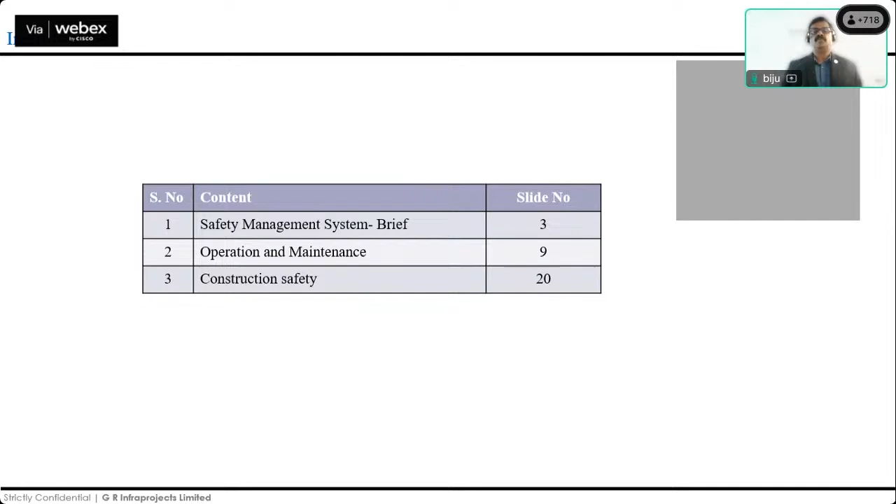To start off on the safety management system, for most companies I would say it is more aligned with the ISO standard 45001. What it really means is we've got 4 pillars, and the first is safety policy and objectives. This institute, organization, or corporate should have a policy and objective where it clearly states their safety thought process.

Then you have safety risk management. Now, safety risk management, we all understand, is similar to business risk management. Safety of the people, of the workmen, of the road user - they're all focused on this.

We've got the safety assurance part, where you monitor, measure, conduct audits, and analyze data for the betterment of a work activity. At the end of it, you have a promotional activity, like the one NHAI conducts at the start of the year - an event on road safety and multiple other events throughout the year.

So all 4 are the pillars for the safety management system, and this in fact drives the organization towards excellence.

Now this management system is then later broken down by all organizations into a kind of framework. What this framework looks like for safety is you've got your customers, your client, your stakeholders, and the legal system. Both of these together need to have a planning at all levels - it could be at a project site level, a corporate level, or different levels. You've got to understand what your stakeholder or legal requirement is talking about.

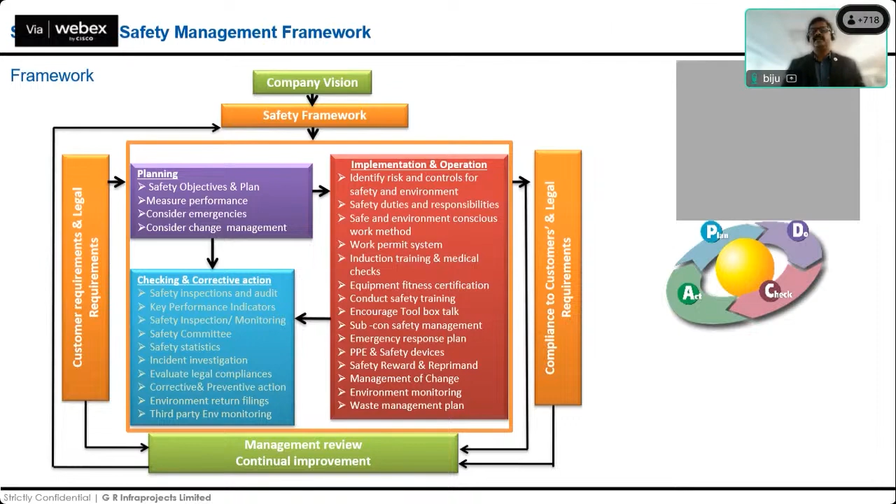Now, to get this entire thing right, we need to first and foremost understand that safety is an integral part of every business. Be it on a client side, be it on a concessionaire side, be it on an advisory side, safety is an integral part. Now when we make that an integral part, that is when we drive in a safety culture.

Safety culture does not happen in a day, it takes time. And why does it take time? Because of this list here, from tracking legal requirements to understanding ISO standards, to understanding what the client or relevant stakeholders desire, what is the process that they have set.

Being a role model in that process, and then you encourage people to be more transparent. When you have workers, contractors, concessionaires reporting observations and near misses, this is when you build transparency and give them confidence that things are working out right. You set out KPIs, KRAs, and so on, until you have an entire system running around the PDCA cycle, like I mentioned earlier, so that a culture starts building.

Now with this, we should also understand the first and foremost part of setting up a culture is understanding the activity in hand. Now the activity here would definitely be a construction activity or an O&M activity. For construction activity, get the method, the process from the design, from the planning to the execution, get it clear across the entire team. For example, I would take one example, say girder erection, which is quite critical at most sites.

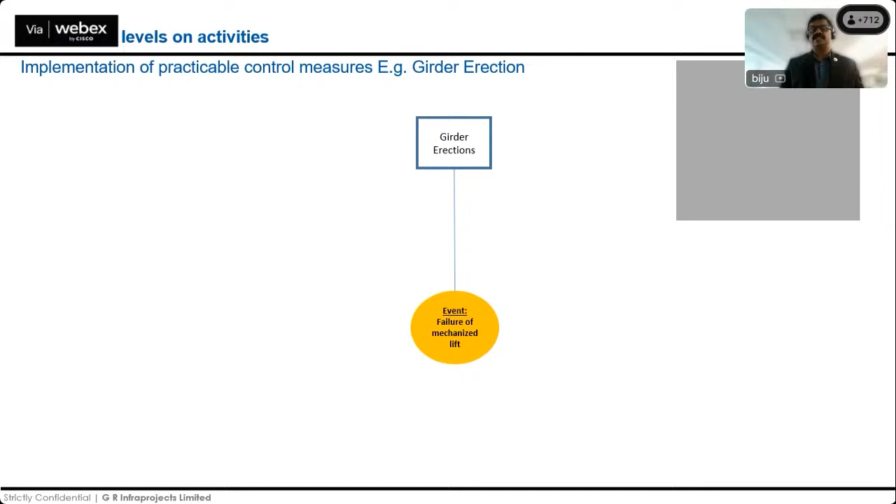So I've broken it down into cause and preventive measure. We'll look into the mitigating measures and consequences later, but let's understand this. This is just an example, please. All other activities are broken down in similar fashion, right? So here for a girder erection, we have the machine involved, that's a crane, we have the load involved, and lastly we've got the weather and the safety control measures.

Now crane, as we all understand, comes with its own requirement. You need to inspect the crane, you've got to have a third party inspection. The ground needs to be done well, it has to cater to the load. And at the end, you have a dry run or a mock drill.

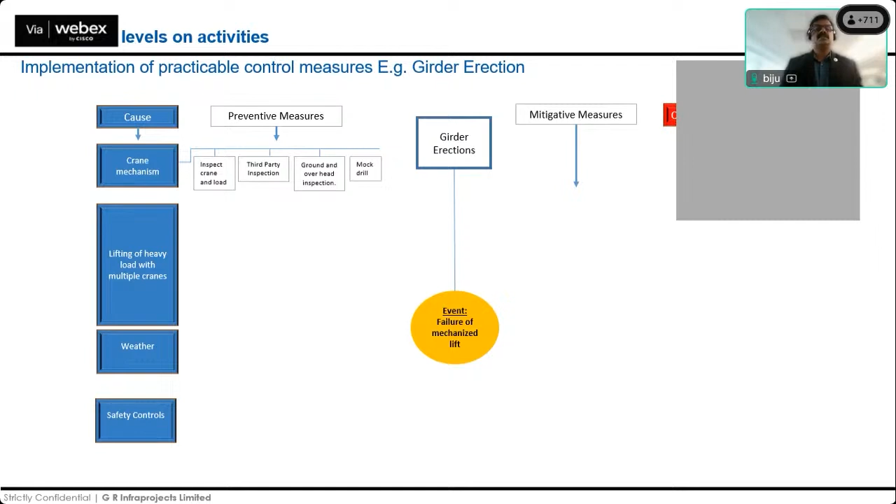Having done this, ensuring that your crane is in good hands also, we set in to make a lifting plan based on whatever the load is, what shape, size, weight. We identify the load and then create a lifting plan.

Now having done that, you've got to understand what kind of rigging practice gets involved. You would have constraints with your load carrying capacity, you would have constraints with the area. So understanding all that, and the shape of your load, what kind of CG does it maintain, now you've got to understand that rigging process.

And of course, for that, you need competent people to support you. From the crane operator side, at each and every step, he's got to understand the safe working load capacity of the crane, whether it is within the parameters. To help him, he would definitely have a signal man if he is in a blind spot.

And of course the weather, like today, the entire weather needs to be considered. Most of the places it is raining, so how do you really understand it better?

And at the end, having understood this entire process, we have the safety control system, starting off with your permit to work system, checking whether any loose objects are left out, checking whether each and every personnel on board is trained, and the roles and responsibilities are clearly identified. The fall protection system is in place, and finally the entire documentation, starting from the lift plan, the third party certificate, to ensuring competency training, all this has to be maintained by the safety team on ground.

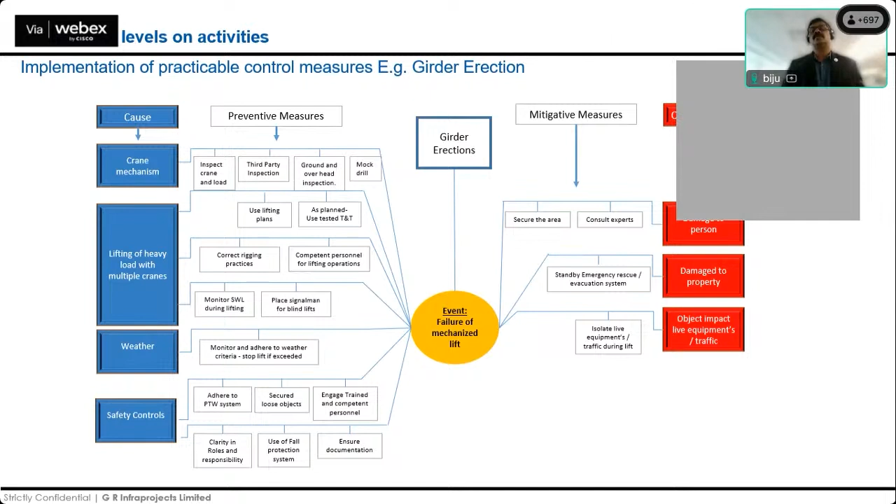Now, having said that, risk involves a fair level of understanding all across. It involves a lot of partners. It is just not the safety team that could drive safety all along. You need experts. And who is the best expert? It's definitely the engineer on ground. And the engineer has to understand each and every activity, the work method, and the risk assessment.

Now, on the terms that are being used, you could just understand it better. RA stands for risk assessment, SWM stands for safe work method. So having understood both of these methods, the engineer then goes in to identify the control measures. Now these control measures generally are listed down in the form of a checklist, so it helps the engineer day in, day out to check these are the minimum requirements.

Having understood that control measures are in place, what does the engineer do? He simply calls in the safety team to verify it. Now you have somebody, a doer and a verifier. You split the entire activity into a doer and a verifier. Now, having verified it, the safety team takes a call whether it is within the guidelines, within the SWM, within the risk assessment.

If it is within the risk assessment, no issues. If it is not, he calls in for a reassessment. He does not let the job go ahead. He calls in for a reassessment. If everything is in place, he says yes to it, and then you start the job.

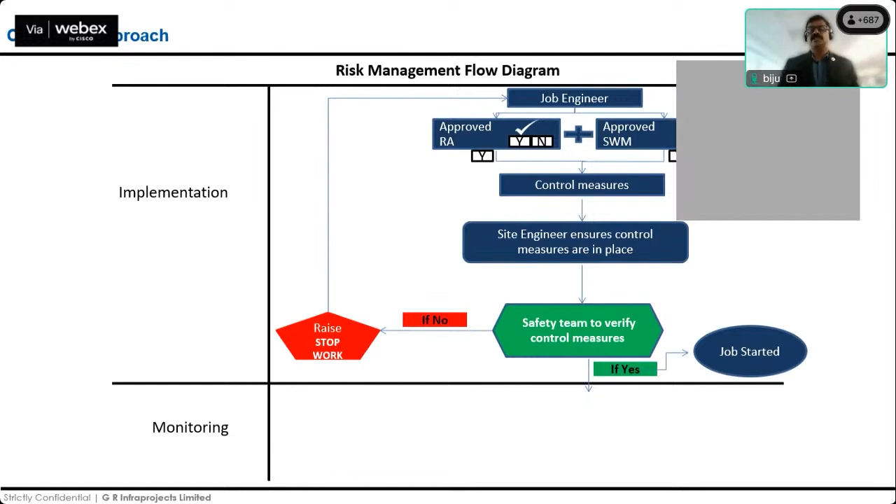So this is the initial process for all activities. Having said this, now your activity could last for an entire day, or it could be a month-long activity. Now you've got to monitor it. The simple monitoring mechanism is check on the work permit system, which is called every day. Check whether it is abiding by whatever the checklist is talking about. If yes, continue with the job. If no, then again you go back to the engineer to rectify it.

So this is a normal work execution process that is undertaken jointly by the safety and the execution team together on site.

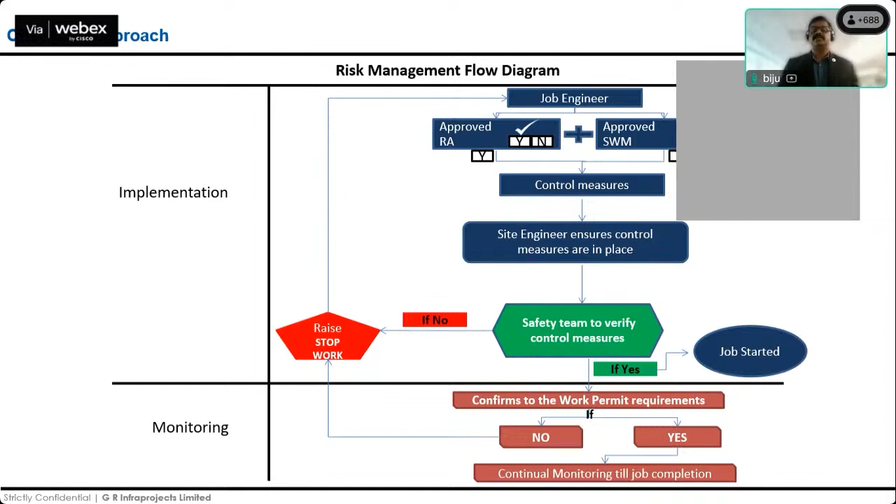Now, having done all this, it does not really indicate that my monitoring, my implementation process are in place, does not really indicate that we are safe enough. So long time back, round about the 1930s, there was a professor by the name Heinrich, and Mr. Bird. Heinrich and Bird, they came up with a triangle popularly known as the Heinrich's triangle theory. Now, this triangle theory tells us that at the base of the triangle, you have unsafe acts that gradually build on over the period into a fatality.

And the unsafe acts, if you realize, it is for 3 lakh unsafe acts. That's a huge number, 3 lakh unsafe acts. You would end up having 600 near miss cases. 600 near miss cases would eventually develop into 30 injury points. This 30 would finally go into 10 lost time injuries, and 10 lost time injuries would have 1 fatality. So this is what Heinrich and Bird wanted to tell the entire world in the 1930s.

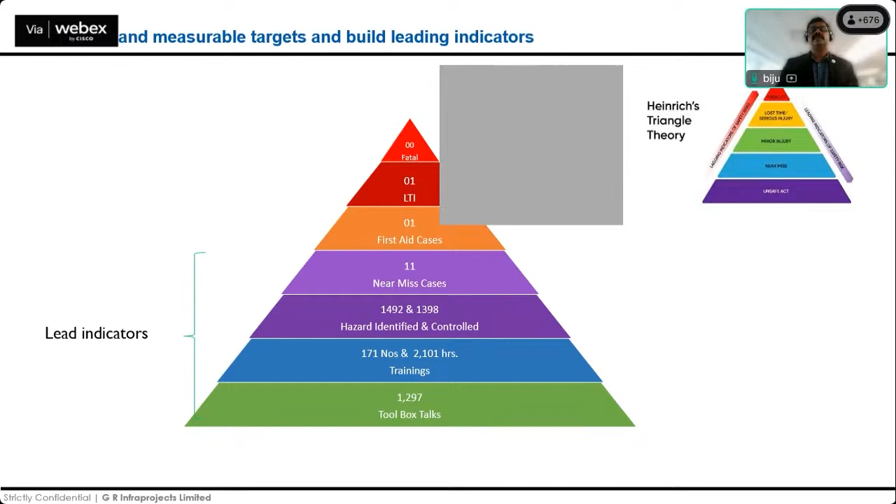So this is how we have understood Heinrich's or Bird's triangle. We set them into two different aspects. One is known as a lead indicator, and the other is called the lag indicator.

Now, I need to prove Heinrich's triangle is non-existent in my organization. So what do I build on? The lead indicator. My lead indicators are toolbox talks, or TBT for short. I build on training, raise awareness, pick up hazards, observations, and controls, and I also support near miss cases.

These four, I keep telling all the people on ground, this is where I need to emphasize. Having done that, that is the only way I can stop the lag indicators, or stop myself from getting into the Heinrich's triangle. This is why every site, every project safety officer or engineer on ground is told how important your toolbox talks at the start of the day is.

Toolbox talks at the start of the day is the base of not achieving an injury. Every project manager supports a TBT, every project manager supports training, every client, every concessionaire does it. This is because it is the foundation to stop any incident from happening.

Near miss cases are definitely proactive, because the more near miss cases you have, the more chances of analyzing, stopping, or preventing an injury. Hence, it has been put into a lead indicator and not looked into as a lag indicator. The more near miss cases you have, the more chances of analyzing and having correct SOPs.

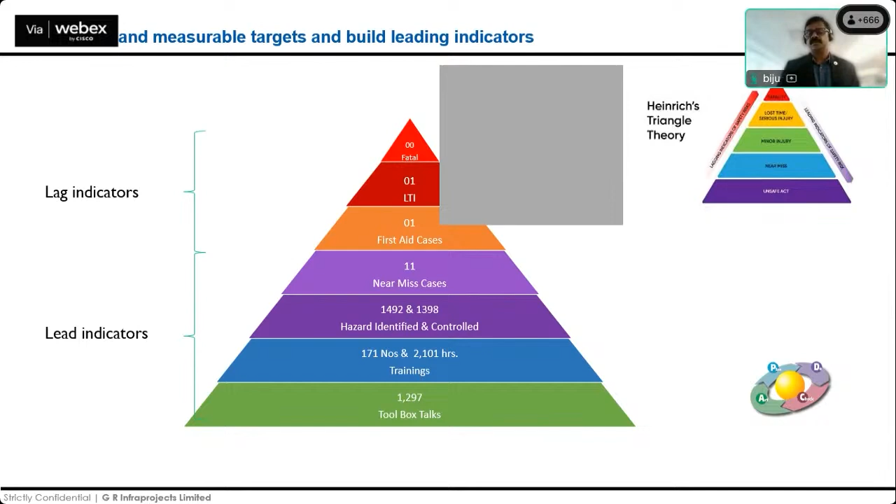Now this is what I call a PDCA cycle, where the entire team works together to drive safety. Now, getting into our core issues, I would start off with operation and maintenance, because most of these things are also part of your construction phase at some point or another, at a different stage.

Every asset on the O&M phase needs to be understood through the asset management plan. What does an asset management plan talk about? It's about aligning policies, and these policies fall under a bigger umbrella termed the Strategic Asset Management Plan, or SAMP. This SAMP rolls out into different projects or assets, where every asset needs to understand the issues, external and internal.

Who their interested parties are. Based on that, every project works out an asset management plan in which they rope in daily activities, monitor objectives and targets being set, and how good they are at improving it. The entire process goes into performance monitoring by different clients, even by road users. First and foremost, every asset needs to have this asset management plan in place.

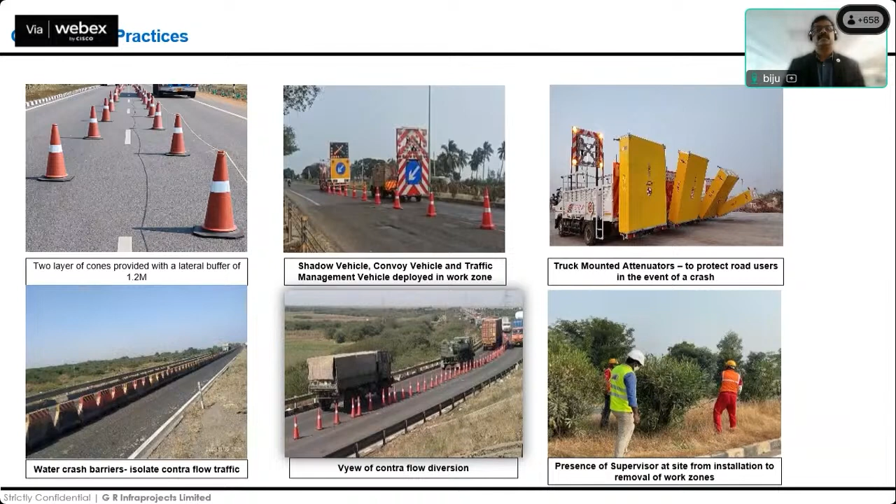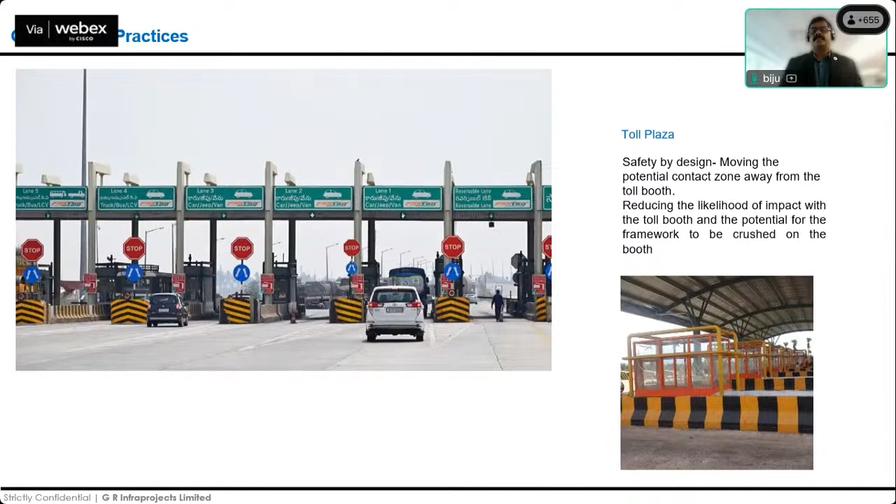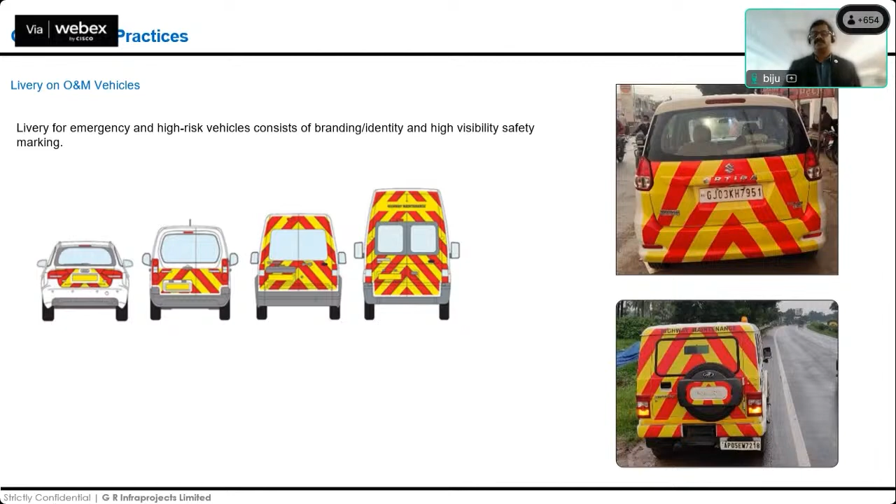Now coming into our core area, how do we ensure that the road user and the worker are in an environment that is safe for both, and as an asset, we have traffic running smoothly. For that, IRC SP 55 clearly outlines the guidelines, giving all the parameters required to ensure this is in place.

Now, our understanding of IRC on ground over a period of time, everybody has represented it in their own easy way. But I would like to deliver what the IRC really tells, what table 4.1 really addresses, or the pictures in 10.1, what it really says. Giving a few examples would make it easier for us to understand any other work zone.

Now, for a work zone on a live highway, if we have to occupy the slow lane, from a road user perspective I have to keep the road user informed if the highway has an 80 to 100 speed limit. I have to inform him at least 1 kilometer, or 1100 meters away. I've got to start indicating my signages, from 'men at work' to getting his speed down to 60, then progressively 30, 30, 30, and then touching upon the initial taper zone.

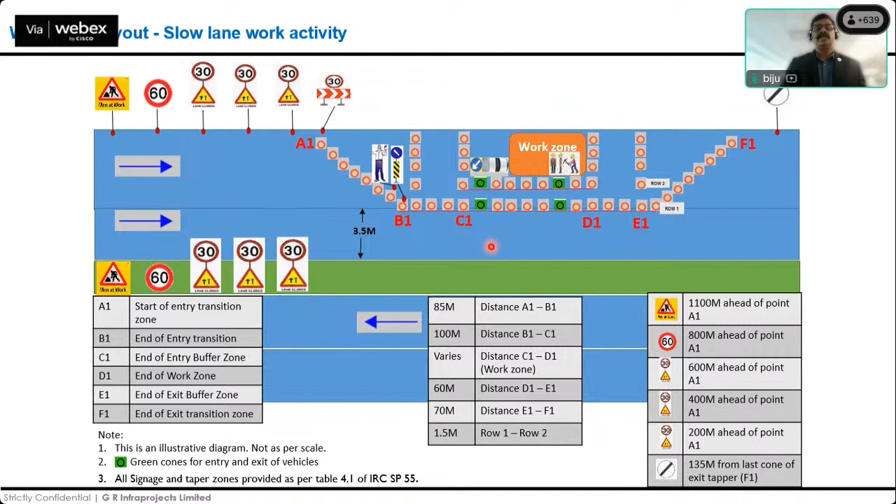This is again on a similar front. When we block the carriageway, we have to block the first of the lanes, that is, you block the slow lane. And after blocking the slow lane, you keep a distance before the vehicle, so that you allow the vehicle on the slow lane to merge with the one on the fast lane. Give that room, and then create a taper.

Now this taper is again aligned with table 4.1, where it is based on the speed of the road. If it is somewhere varying between 60 to 100, you automatically will have the ratio. We keep it on a safer side as 85 meters.

You align the entire thing and move the traffic into the median opening. Now a median opening, based on the volume of traffic, size of traffic, is derived somewhere between 15 to 25 meters. This is the minimum that you would need, 15 meters. Move them into the median opening and get them across into the two-way road.

Now, when getting them into the two-way road, we have to understand that on whichever carriageway your traffic is, those road users are not accustomed to having head-on traffic. They have been traveling kilometers and are used to one-way traffic. Now you have to give them an opportunity to understand there is some obstruction in front and they could find oncoming traffic. This is where the importance of all the signages are.

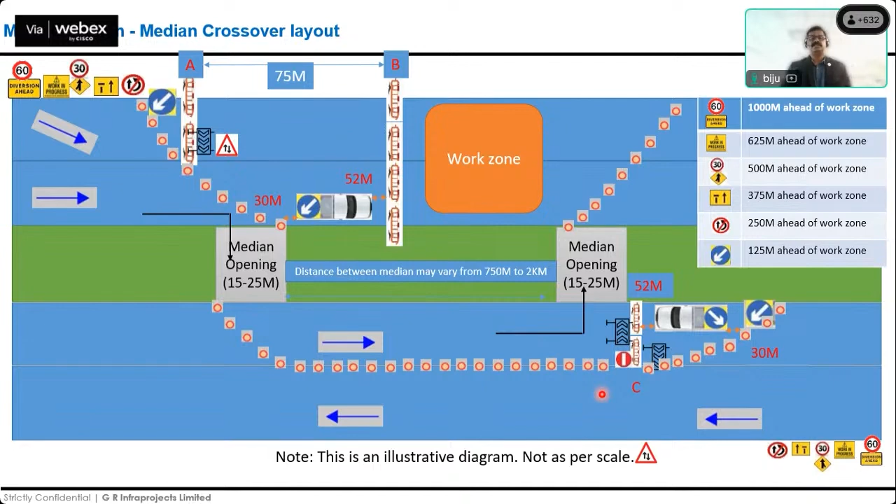Right. And then, Chairman sir, you were talking about your experience on the road. I think typically it is this kind of a requirement where the contractor or the concessionaire understands how to display it to the road user without creating too much disturbance. So the entire work has to be barricaded, where we consider the incoming and outgoing traffic of the work activity itself.

So these are jersey barriers that have to be aligned next to each other. Now it depends on the longevity of work. If it is a one-day work, definitely we would have the portable barriers or the water-filled barriers. But if it is going to go in for a long period of time, more than 3 days, it is best advised to have concrete crash barriers supported externally with water-filled barriers, so that if there is an impact, you still have the water-filled barriers supporting the road user.

Now, all these work zone layouts are designed keeping in mind 81 to 100 kilometers an hour. The specifications of signages are in this table, from IRC SP 55 2014, figure 10.6. Participants could have a different figure as far as a taper zone or exit taper is concerned, because the table gives you a ratio between 1 is to 20 and 1 is to others. So those ratios are multiples.

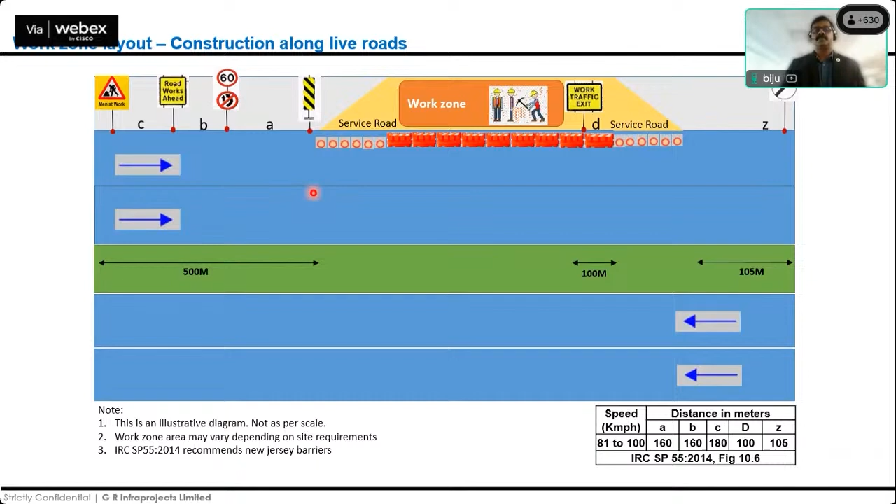So this is as far as work zone layouts are concerned. And how is it supported? It is supported by an entire system which gives the road user the opportunity to identify what signages and what things will support him in case of an emergency. You would have the RPVs, the cranes, the ambulances, the flagman on board, and of course the solar blinkers that are there.

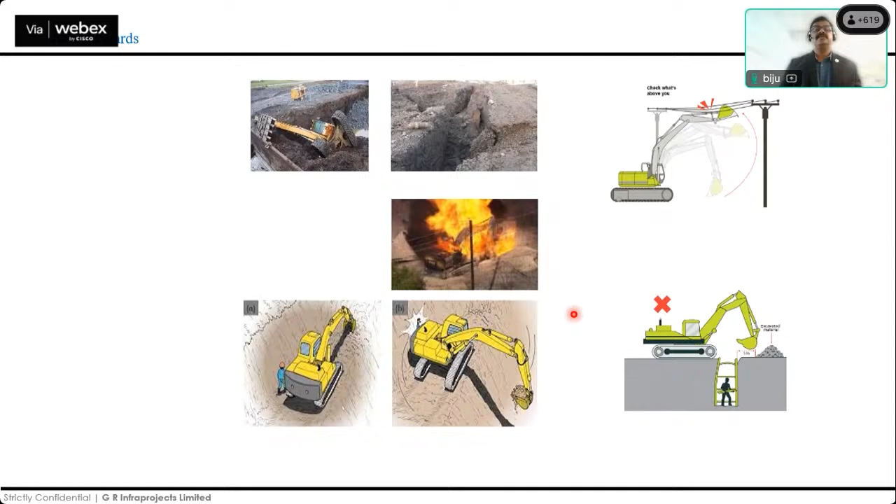Right, so let's move on to the construction safety part. Here too, I have pictured the events that are critical or the areas high on injury rate, and we need to understand it a bit differently. The first on the list is definitely excavation. Every structure starts with an excavation. When we start with excavations, things we got to identify are the utilities underground and overhead, and the kind of soil you are handling. So these are two areas we'll have to look into.

And the hazards listed are: it could lead to soil collapse, you could find a utility that could lead to an explosion, you could have a hazardous atmosphere underground depending on the trench you're creating. If your trench is too deep, you definitely would have a hazardous atmosphere. Are there adjacent structures next to you? Have you defined the access and egress? Are people or vehicles moving around the excavation? It is almost always seen that the moment you excavate, there will be onlookers, villagers or roadside users, so you've got to handle that. Moving machinery around over the excavation.

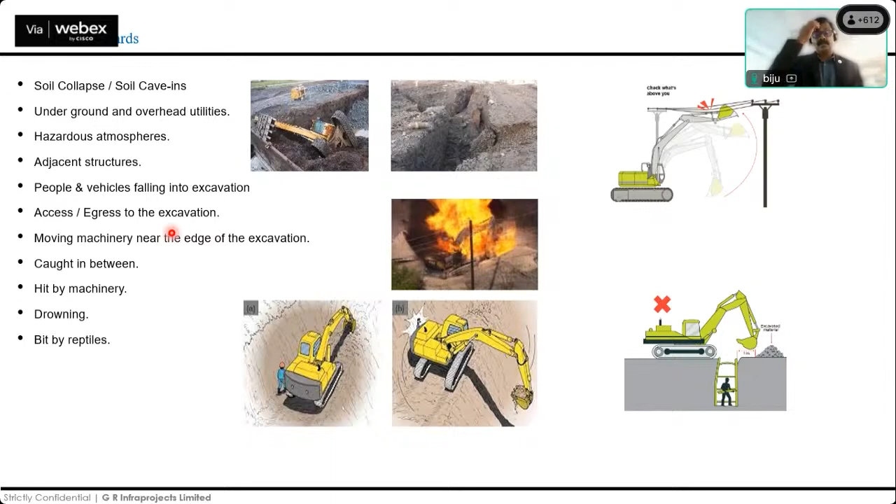Now this could be your work machinery or the road users. So how far are you pushing the machinery from your excavation? During movement of machinery, people could get entrapped because there are blind spots for the operator. It could lead to drowning, especially in this kind of weather where it is raining in most parts of the country. And then, of course, the reptiles. Now, how do you control it?

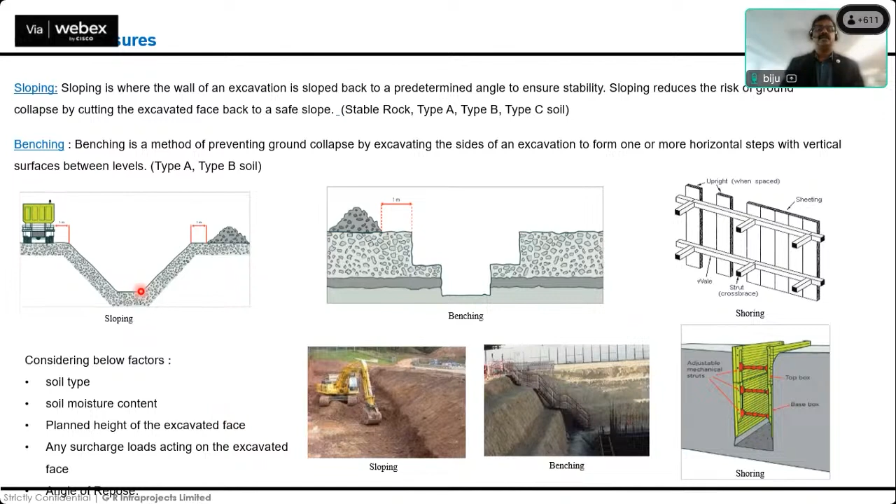Well-defined measures already there are engineering practices: sloping, benching, shoring. These three things are well defined, and based on the type of soil, type A, B, and C, we would have sloping and benching. If it is beyond that, we would consider shoring or sheet piling, whatever the engineering term is. But before we do any of this, the first and foremost part of our understanding should be: what kind of soil are we handling? What is the moisture content in the soil? What is the height or depth you're going down? What is the width of the entire area you're covering? Do you have any other kind of load acting, like a structure nearby or traffic? This has to be considered before you undertake any of these engineering practices.

Having done that, there are other control measures also, like checking your utilities and the atmosphere down below. We all know there are utilities that are not mapped, like electrical lines or networking lines. So those are seldom mapped, and we have to use methods like the recently introduced ground penetrating GPR. They help, but at times GPR does not give you the right indication. So if there is a doubt through local sources, it is best to go in for a manual excavation and then follow it up with a mechanized one.

And like I said before, hazardous atmosphere, where we check for the type of gases that are there. We also got to check through the LEL meters what the explosive limits are, LEL or UEL. Check out what the limits are. Oxygen level definitely needs to be understood.

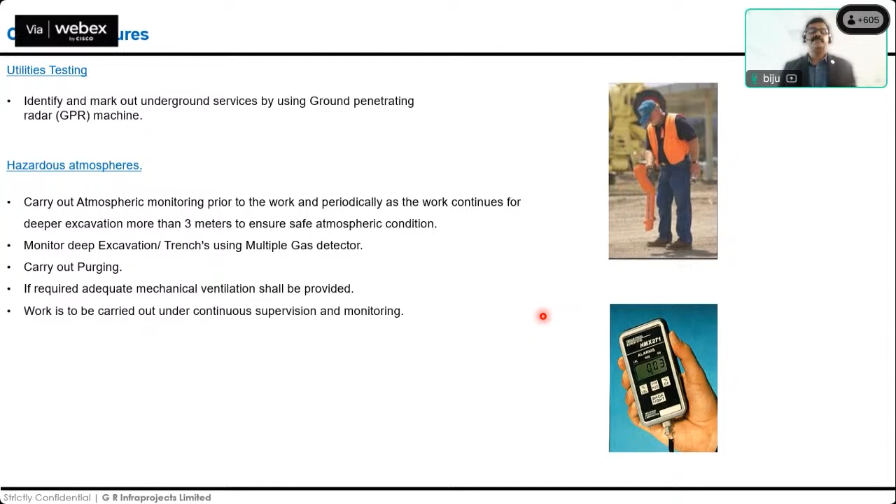So that was as far as excavation was concerned, the control measures that we just had.

Work at height happens to be the number one killer as far as construction is concerned. Any kind of construction, be it infrastructure, building space, or office space, work at height is always the number one.

One thing I would really like to highlight is the recent usage of mechanized lifts or MEWPs. MEWPs facilitate easy movement, taking you to different heights. They're called mobile elevated work platforms for a reason. But when we don't use them well, or don't secure ourselves in that confined box, there are high chances that if there is an event, we would fall off the box.

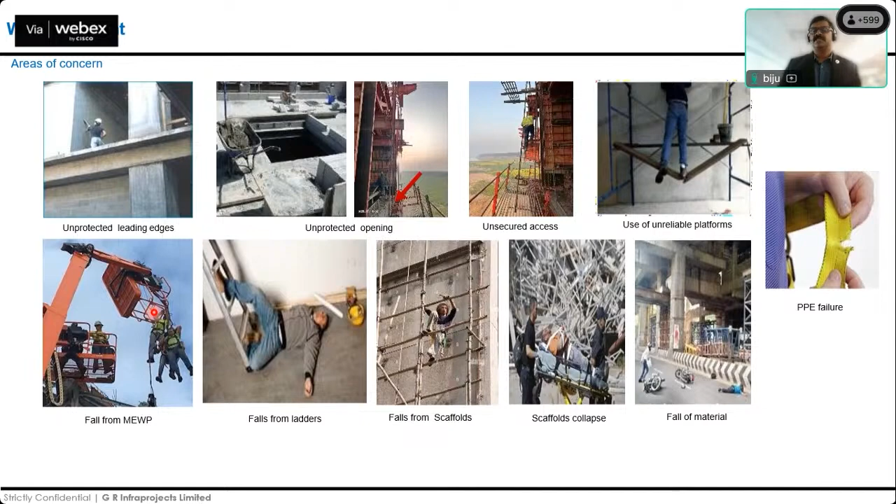On the metro side, we've had recent cases of fall of material, which is being aired by the media, where a poor road user who's got nothing to do with my work, but is coming back from his work or moving somewhere with his family, gets hit and pays the price. So these are major concerns that we've got to understand.

And how do we tackle these major concerns? First and foremost, for any work at height, you've got to access that place. Now accessing the place, there are only two ways: either you have a proper ladder, a stair tower, or whatever MEWP mechanized lift you have. These ladders come with standard arrangements. It's only when I go into makeshift arrangements that I will have an issue.

When I say makeshift arrangement - if I have to access a height beyond 9 meters and I still use a ladder whose permissible limit is 9 meters, and I want to go to the 10th or 11th meter, what I do is use that same structure on which the ladder is and try climbing it. That is where I fall down. My ladder has supported 9 meters, but the other 2 meters are my own method. So this is where it will cause hurt.

Similarly, on a stair tower, if it is set up in a standard manner, it is defined to cater to a certain load. But when I do a makeshift kind of thing, or do not inspect a previously used stair tower, it ends up in an issue.

MEWPs, like I just mentioned, are machines that need to be inspected by third-party members, third-party inspectors. And having inspected, it's got to be monitored if people are using it in the right manner. So this is as far as access is concerned on height work.

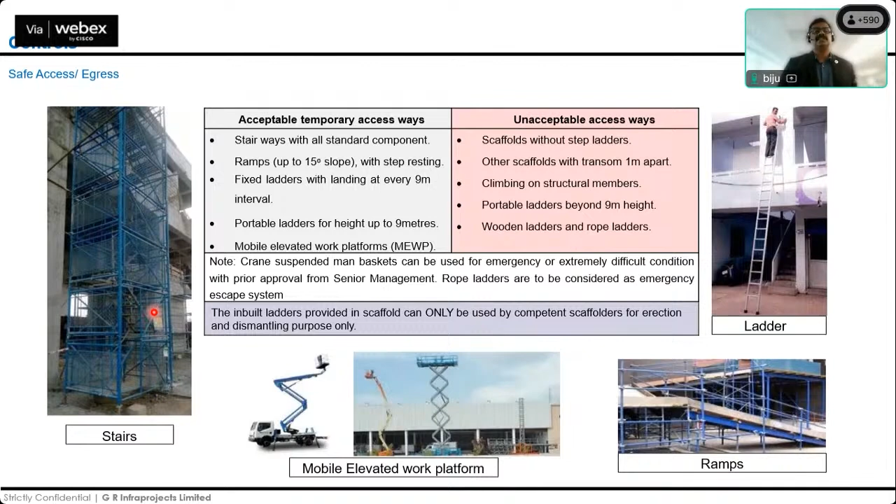After accessing whatever levels, we've got to have a work platform. A work platform is clearly defined - you've got to have a fully boarded work platform so that you move in an easy manner, without the fear of falling over.

You have mid rails and top rails. Mid rails are almost above your knee height, and the top rail is almost around your waist area - so that's 600mm and 1200mm measurements. When we explain it to the worker, this is how we tend to describe it: keeping it above the knee level and the waist level.

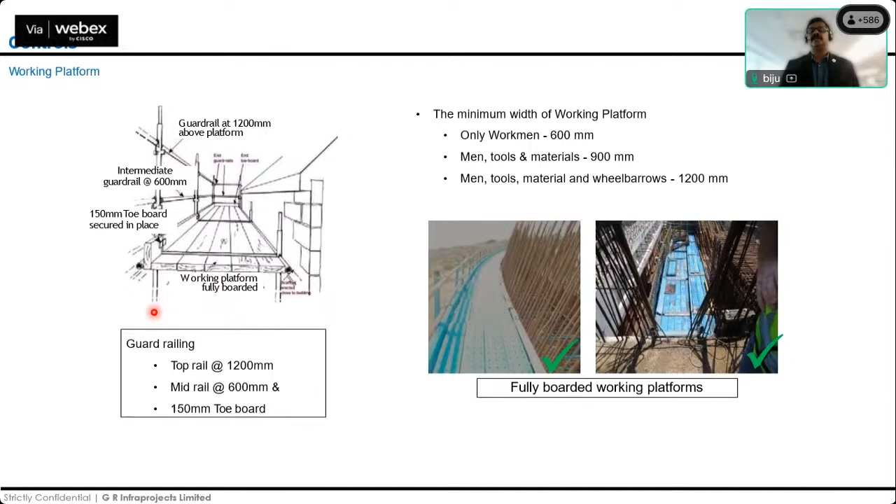Fully boarded working platforms ensure two things. One is giving confidence to the worker that he is well protected. It also gives confidence to the worker working or moving down below that there is no item that is going to be falling from top.

This is again generally seen where structures are concerned - where bridges are there, be it on a metro or on ROBs, where we have these open zones. In these open zones, generally we put in a jali kind of a thing, a rebar tied together. It sometimes works, sometimes it does not cater to the load, and when it does not cater to the load, that is when somebody gets injured.

The best practice is to keep it barricaded. Now, to what extent depends on the time limit that you have - is it for a day or is it for a month end? If it's for a month end, the photograph indicated really applies, where you clearly have a mesh, a toe block, guardrails and mid rails in place. This is a very clear indication that there is an opening, and be aware of it.

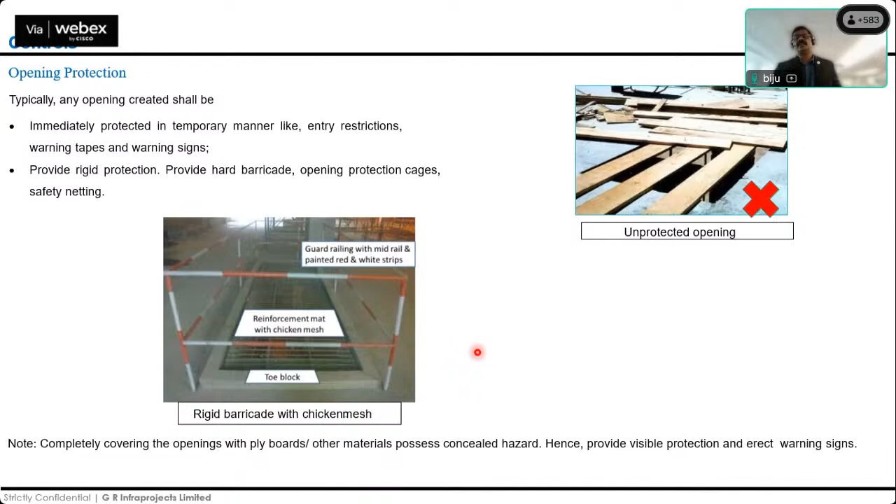The next line of defense, if at all some material falls from height, or your worker or staff falls from height, we need to give them still a room to survive from injury - and that's a safety net. Safety nets come in very different shapes and sizes. The only thing we've got to understand is we've got to keep the safety net tied not more than 6 meters below the point of work.

So for the falling material hazard, it provides a kind of cushion between the net and the ground below. If you keep it too low, there are chances that whatever falls might go and hit the ground. So that is the understanding as far as the safety net is concerned.

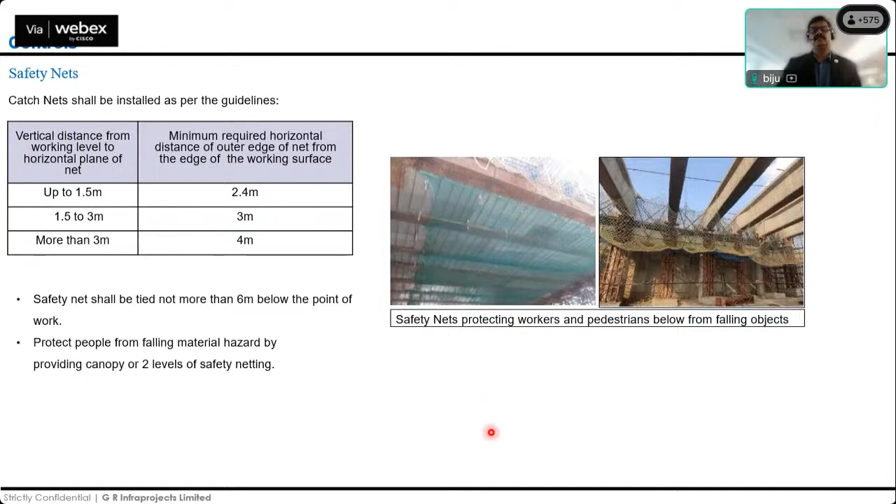The most critical part of every construction is having a lot of your work done by machines. Deploying machines is definitely going to help you reduce the manpower on site. It reduces the time frame and executes all the projects well. Having said this, the man-machine interface is the highest risk for any project.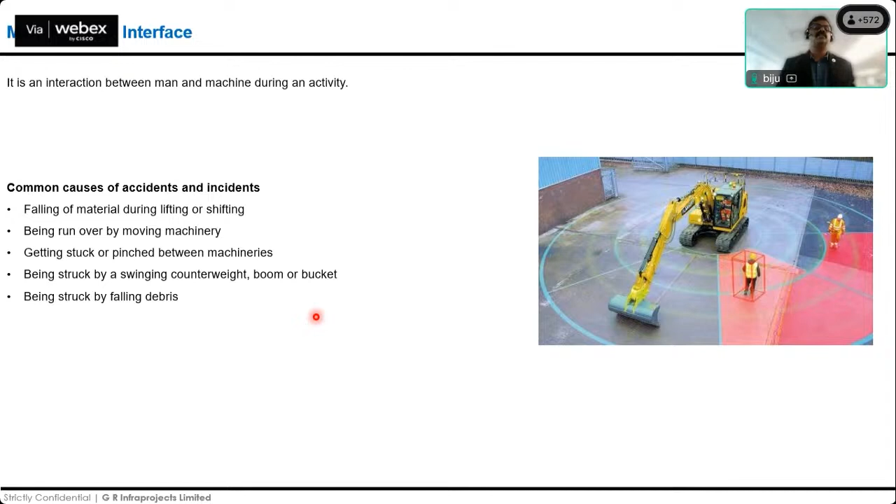So a man-machine interface is everything that concerns the machine and the men around it. Getting caught in between that area leads to an injury, and we've got to be aware. It could be an excavator, a forklift, or a crane - all of these machines come with their own risk. Identifying the risk and having control measures is what we need to understand.

First and foremost, we give a very clear audio visual cue to the fellow worker or road users that this is a machine placed here for a certain activity. Before the start of that machine itself, we sound the audio devices - it could be a delay start mechanism or flashing lights. You have to have an indicator that this machine is going to start, because there are incidents where the operator's fellow workers sleep under these machines, and when the operator gets a sudden call and moves the machine, the poor guy sleeping behind gets crushed. So we need to have that kind of audio visual device on board these machines.

We've got to give enough room for pedestrians or workers to take shelter appropriately, so they don't go under these machines to sleep or rest, or they walk in well-defined areas where you have laid a boundary so that vehicles do not infringe. You set defined speed limits - 5, 10, 15 for every work site - so that your driver is clear on what to expect for anybody crossing in that area.

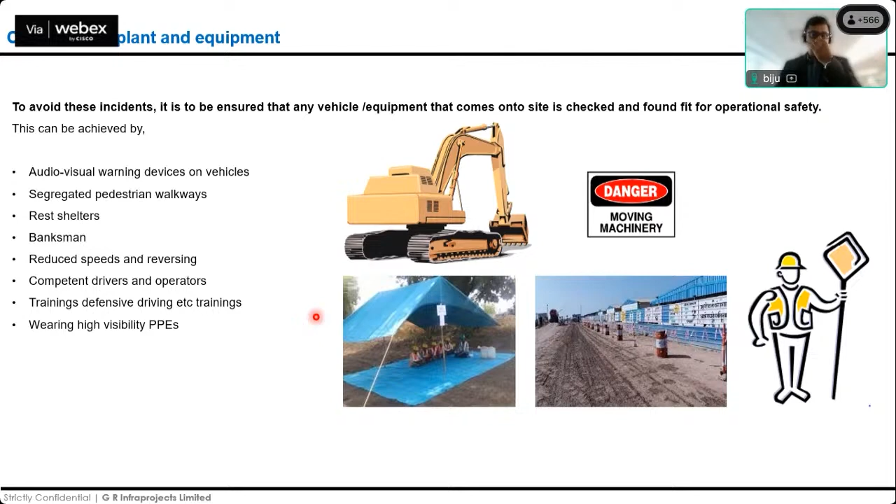And let's not forget, every member on site should have their high visibility jacket or retro reflective jacket. Whenever you're on site, it has to be worn so that you give an opportunity to the driver and yourself of not getting injured.

Whenever machines are in operation, the most important person that an engineer, staff or worker should look out for is a banksman. Banksmen are termed differently in different organizations - banksmen, signalmen, traffic marshal - these are all terms used in our industry, and their jobs are more or less similar. A signalman's first and foremost job is keeping the machinery away from himself or any other person in and around that area. To do this, he has to understand the science behind keeping himself visible to the operator. He has to maintain visual contact with the operator, whether standing in front or at the rear.

So his job as a banksman is very important for activities like grading and asphalt laying. These are activities where a real competent banksman would do a world of good to the road user and the occupier of a project.

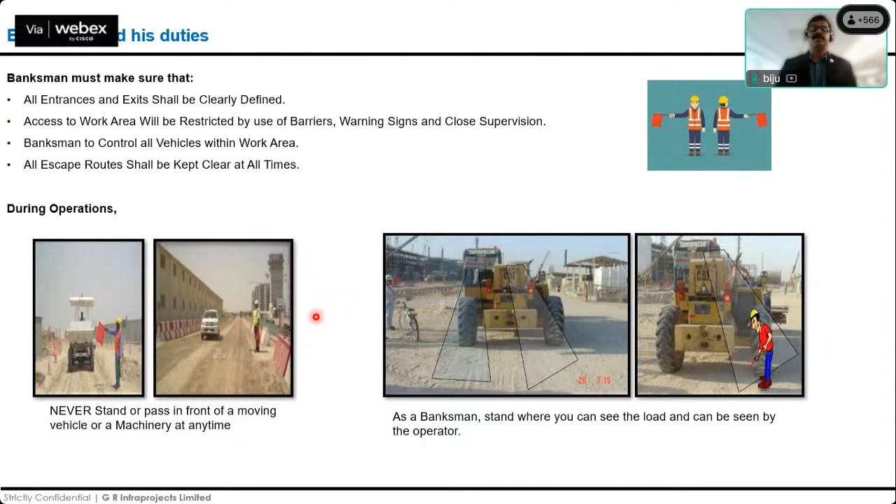Now, having talked about the O&M phase and construction phase, all these activities need a kind of maker-checker concept, best understood as a work permit system. It is applicable in all kinds of industries, be it manufacturing or construction, and it is called a legal document in many of our acts. This work permit system tells you what the prevailing activity is and what its control measures are, and whether those control measures have been considered. Like we started off with a girder, and I showed you the preventive actions - those preventive actions need to be listed out in your work permit system.

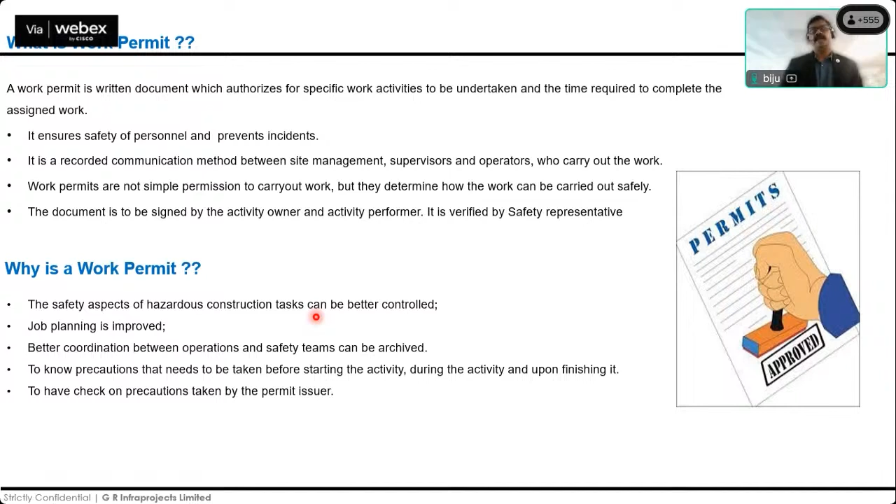It's a kind of checkbox where you understand whether these actions have been done for the day or not. This gets recorded by the site management supervisor, operator, whoever is carrying out the work. It's not a simple permission for whoever wants to carry out the work. The contractor or concessionaire team takes the work permit, gets it across to the issuer, and sets out an entire process of verification. This work permit document simply caters to the hazards - have they been identified, and are the control measures in place? It's just an assurance part of it, where day in, day out, our engineers and safety team keep approving the work permit and verifying it.

Now, when is a work permit really required? It's generally required for activities that are not common - not on an everyday basis. Activities like blasting, excavation, height work, confined space, hot work permit, electrical work, radiation work - these are a common list of areas where work permit is generally called for. There are other areas too, depending on the client, consultant, or other stakeholders. They do call in night work permits and general work permits also, so it depends from place to place.

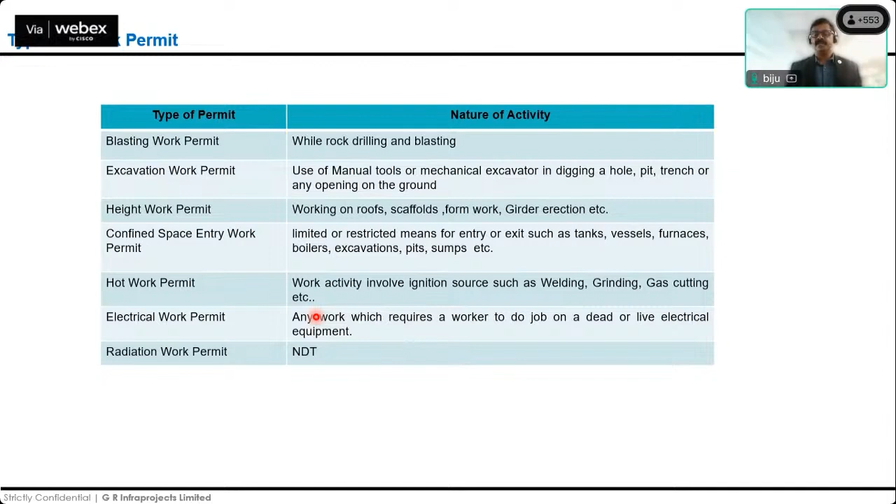And how is it really done? Let me quickly take you through it. First and foremost is your performer, the guy doing the activity. He calls for a work permit 24 hours before the activity is done, or when the RFI is called. The moment he submits the work permit, the performer also understands whether the preparation for the work is up to the mark. Having done that, he submits it to the issuer, generally your engineer on site. The engineer checks whether the performer has the necessary safety precautions in place to get the job done, and based on that, issues the work permit.

Now, when the work permit is issued, that is when the verifier comes in - generally your safety person. It could be your client or consultant also, but you have to have a verifier who confirms that the work permit is respected in all ways.

After that, the performer commences his work activity. Now he carries on his work activity, and when the work activity is finished, the issuer closes the work permit, and then it is filed. This is a standard way to ensure that your risk control measures are being respected at the ground level, and it is a very well documented manner so that at any point we could have it for further analysis.

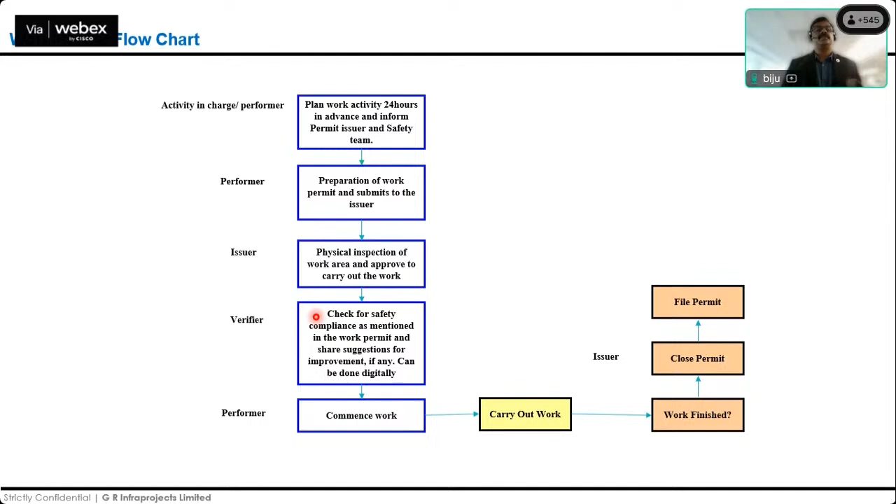Like I said, at the end of the session, I would go through a case study. Most of the time when we travel across national or state highways, we often see some worker or the other on the live road, and we often think that to complete that entire given task on the live highway is a real risk.

So I came across a female worker who was hit by an HMV while she was carrying out cleaning works of a pothole.